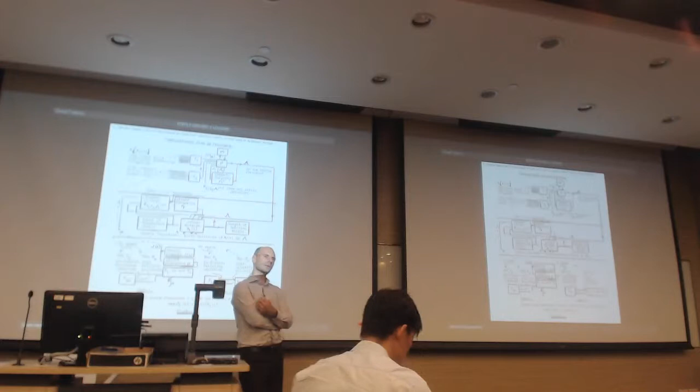And they did a bunch of diagrams, and some of these look like the messy diagram I showed you. Looking at relationships, looking at how the building needs to evolve or perform when it's being used. So he's not looking at structure as a starting point, and they're not looking at form as a starting point. They're looking at how the building is essentially a framework, and how that framework can contain or allow or enable events to happen. And so one of the earlier diagrams to emerge from this was this kind of diagram.

Just a simple representation of architecture as a truss, as a kind of volume, and then things plugging into that in different ways. And it almost doesn't matter what's plugging into it. What does matter is that you can plug anything into it, really.

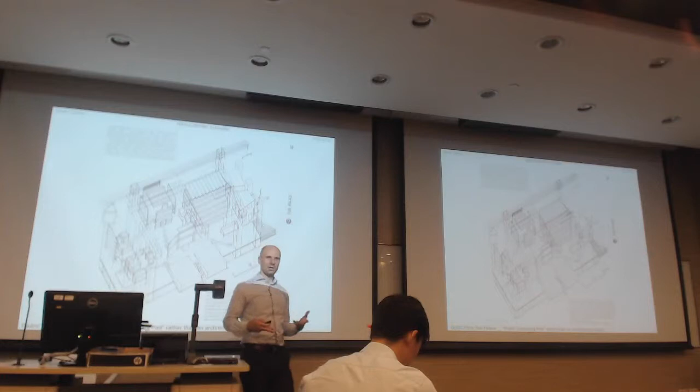The eventual design, which was never built, or was built in a changed form in a different project, really emerged as just that concept, as a kind of open truss framework with various pieces plugged in.

And everything in this building moved. Everything was flexible. Everything could be organized and planned to change scale, to change shape, to change in terms of its sort of technology, which would be available in any given room.

And all of this was enabled by, and this is 1960s, by a kind of computer that they designed. And this is before computers could be put in a single building, really. Artificial intelligence wasn't really a sort of thing back in the 60s, but the architects and the scientists thinking about systems proposed a computer which was in essence an artificial intelligence that would move the building.

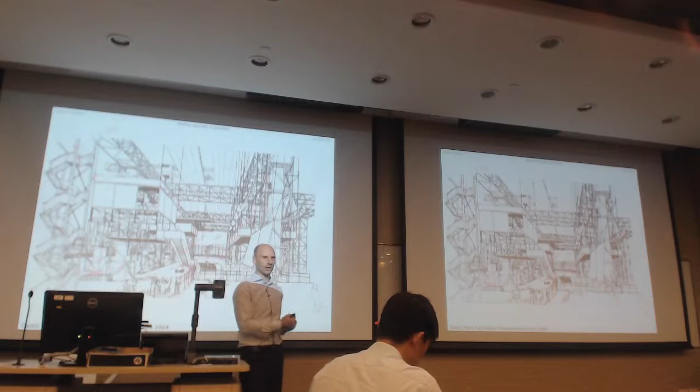The building would learn from its users. So as more and more people wanted to come to this building and go to theater, the computer would decide to arrange some of the rooms more often into theater shapes. And so the building and the users have a kind of continuous feedback loop that actually constructed the form of the building over time, rather than a sort of fixed object.

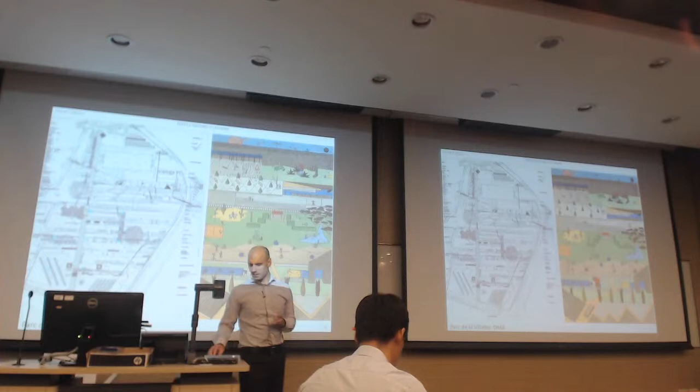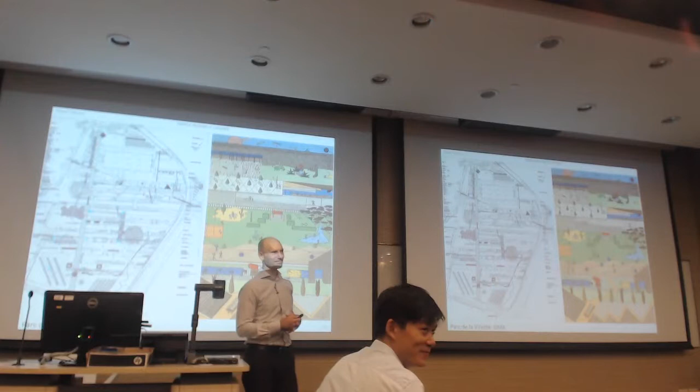One of Cedric Price's, not protege, but someone in that circle was Rem Koolhaas, who you probably all know about, right? OMA. Do they know about this? They know about this stuff, right? OMA is a very famous, big name architect nowadays.

In the 80s, Rem Koolhaas was not a very famous, big architect or planner. But he did a competition entry for a park in Paris. And he had just written a book about towers in New York called Delirious New York.

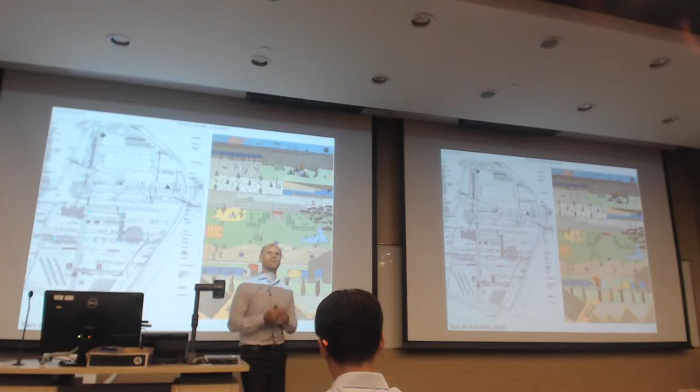And he thought about the park as different from the kind of parks that were in Europe at the time, which were sort of scenic and you could stroll through them, and they had rolling landscapes or maybe some axial decorative gardens. He thought about his park as essentially a skyscraper on the ground, so tilted over. And so he created these strips. And in every strip, you could do something different, just like kind of in a tall building, every floor can be something completely different.

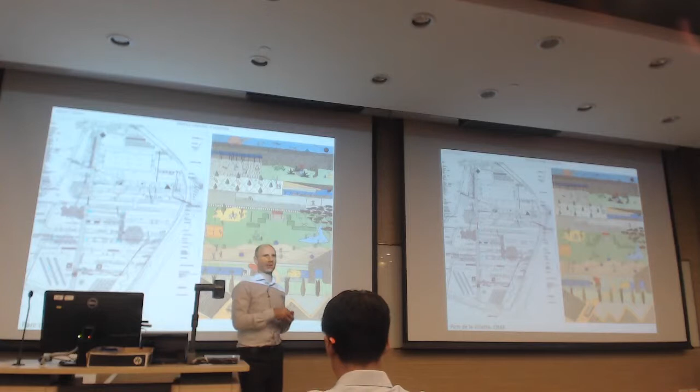And so his proposal for this park didn't win. It came in second. But it proved to be really fertile ground for a lot of landscape architects and architects working in the 80s, 90s, and even today. So this becomes a very prominent starting point for thinking about the discipline of landscape architecture, about the discipline of urbanism today. Parc de la Villette, Rem Koolhaas, OMA entry.

The stripy landscape, where the landscape is sort of just a framework, just a holder for activity, and actually the design is informed by these different activities taking place next to each other.

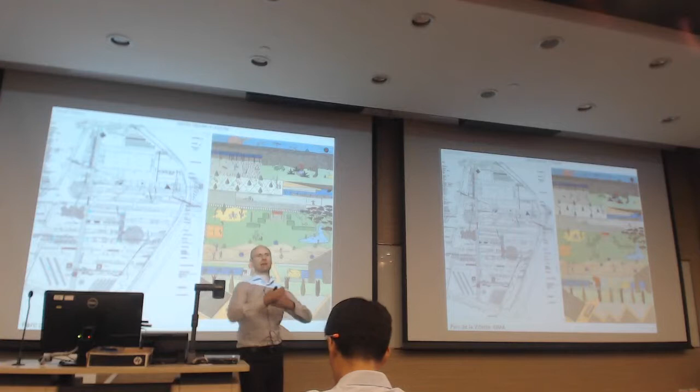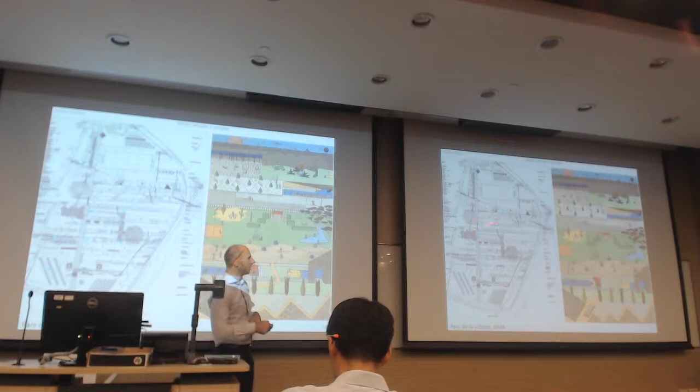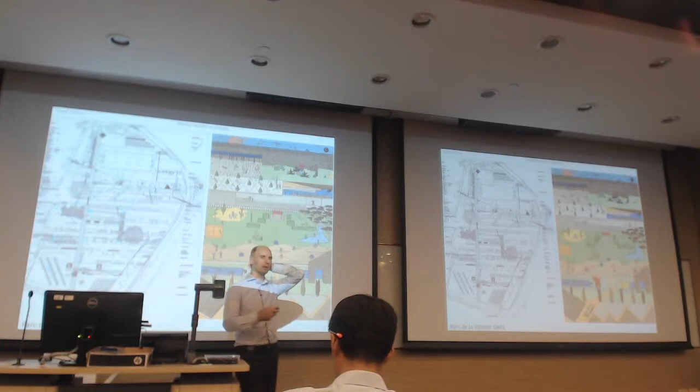And one of the things that came out of this was the realization that in a park you don't have to plan every single thing. Not every space needs to have a name. The most interesting things come out of the areas between things you program, where things overlap, where things hybridize. And so that kind of thinking is linked to, or you can actually prove it's directly linked to, a lot of Cedric Price's thinking about open-ended architecture and open-ended planning.

So just a few images on the ground.

The second point, the site. I want to argue that for you, site should not just be a boundary and an abstract idea of context. Maybe some history comes with the site. I want you to think about the site as being the material foundation of what you do. That the site is thick, that it has a lot of layers, and that you can mine those layers, literally and conceptually, to form the basis for your designs and your projects.

There's a good quote about the surface, about the site, by Stan Allen from about 15 years ago. He's also an architect, but he used to work with James Corner, who's nowadays a very famous landscape architect. He's the one that did the High Line in New York City.

Stan Allen says, increasingly landscape is emerging as a model for urbanism. Landscape has traditionally been defined as the art of organizing horizontal surfaces, so arranging gardens. By paying close attention to these surface conditions, not only configuration but also materiality and performance, designers can activate space and produce urban effects without building buildings, without the traditional apparatus of traditional space building, which is towers and blocks.

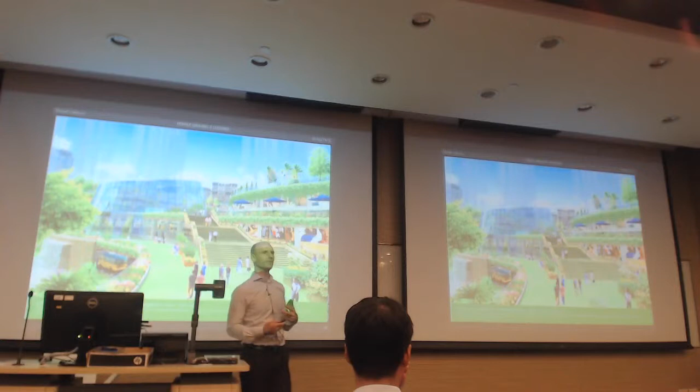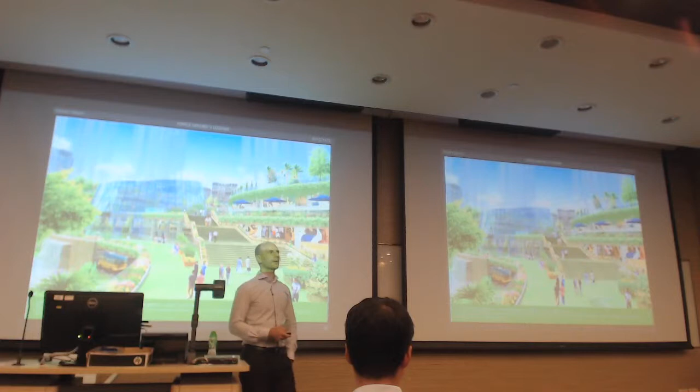So just even in thinking about the quality of the environment is the first thing. When thinking about ecology, we need to think about that habitat, that place that we live, that place where animals live, and try to represent and build that in more deep ways, not in shallow ways like this.

One of the, at least for landscape architects, you'll learn about this guy, Frederick Law Olmsted, who did a lot of work in the United States and a little bit in Europe, a long time ago, 100 years or more. He sort of led the way, even that long ago, in thinking about ecologies from the standpoint of a designer.

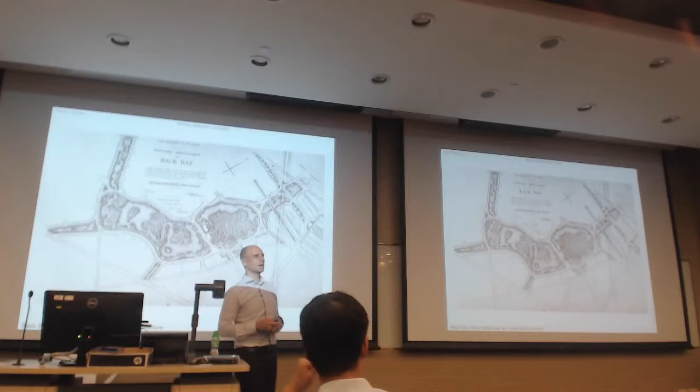He brought tidal water back into the area to flush out a lot of the polluted water and soils. He created gates and weirs to control the water at different times of the year, and changed the transportation around the area so it became a sort of enclosed urban park, one in which water would move through on its way out to the bay.

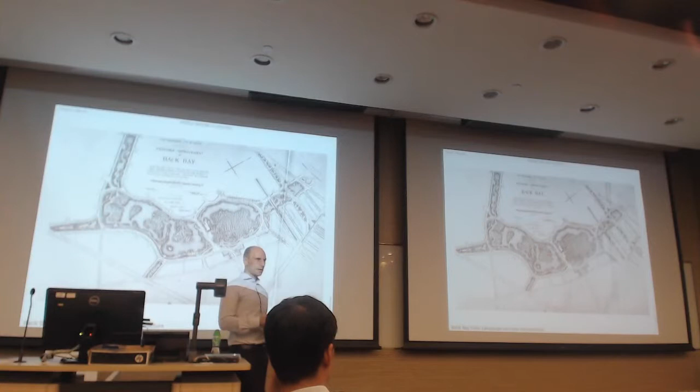This is at a time when a lot of landscapes being made in Europe are very pastoral or very much Beaux-Arts style, very decorative. He does something completely different.

He has done pastoral landscapes in the past - before this project, he had just finished Central Park in New York City, which many of you have probably heard of, a very pastoral landscape that becomes a center in New York.

For this project, he looked at the existing ecologies that were there - the grasses, the crabs that walked around, the way the wind moved through the place - and he wanted to build and design a landscape that actually mimicked the existing landscapes that were there before they were somewhat forgotten.

Even though he's working in an area of Boston that in the future would become very rich and affluent, his plan was to build a working landscape that echoed the ecologies of the past and looked nothing like what people were used to seeing in the gardens of the city at that time.

It was very much a functional landscape, an ecological landscape, a wild landscape, but one that was at the same time a public park.

We have to show pictures of it in the past because eventually, as the city grew around it, other designers came in and started to build beautiful little parks around their buildings, so it doesn't really work like that anymore. Today it looks like a beautiful pastoral park, but in the design of the architect, it was very much a functional, ecologically rich, yet also ecologically inspired environment.

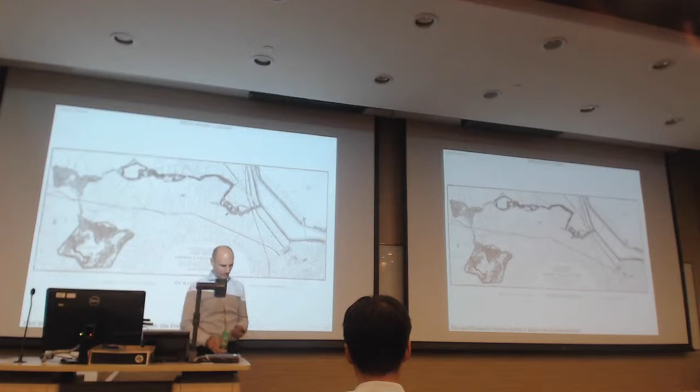Ian McHarg is probably someone the architects won't hear about again, but the landscape architects certainly will. Ian McHarg was an ecologist, a landscape architect, an urban planner in the United States, working in the 60s and 70s. He drew out some other issues about ecology that are still relevant within the profession today. He wrote a book called Design with Nature, where he asked us to reconsider how we live as people of the world. He was a very open thinker in the landscapes around us.

He had a very simple technique for understanding his environments. He would draw them. This was a time when they didn't have GIS, computer mapping, or CAD drawing, so they would draw these maps by hand, looking at aerial photographs and site surveys to map different things.

His big revelation was that he would not map landscape types, like saying this is a forest here and this is a meadow there. He would only look at their suitability for different things, depending on the project. For example, the maps you see here were for a project where he was asked to locate a freeway through an area of countryside, so he looked at that area only from the standpoint of building a freeway, because that was the problem in front of him.

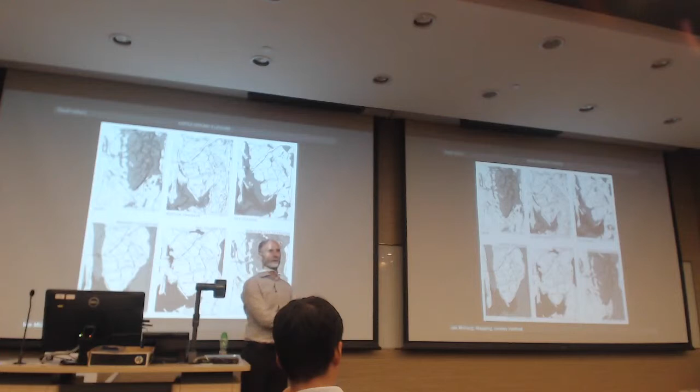So he looked at the soils and mapped where they were good or bad for building highway foundations. He looked at habitat and said, we don't want to build a highway in this really nice habitat, we want to build it over here. He would make maps with shading from white to black, black being least suitable, white being most suitable for multiple factors, then lay all these maps together on pieces of clear paper.

This became known as the overlay method. It's not something he invented, but something he made very popular. All those gray and white maps would lay on top of each other on a light table, and he'd trace a line through the areas left over in white, which again were the most suitable, and that's where the highway would go. It's a very scientific way of thinking about ecology, a process that came from a very informed way of thinking about ecology and living in the city.

That practice evolved, through working with people at Penn, into a computer system that would do the same thing. That computer system eventually evolved into GIS, which, at least for landscape architects, is a very big component of your education in Hong Kong.

The thinking wasn't piecemeal behind this practice. It was very much about thinking of overall landscapes, about performance, habitat and ecology in very open ways. He would look not just at single sites, but consider their functionality from the standpoint of the larger region they sat in, so he was careful to think outside the site boundary, not just within it.

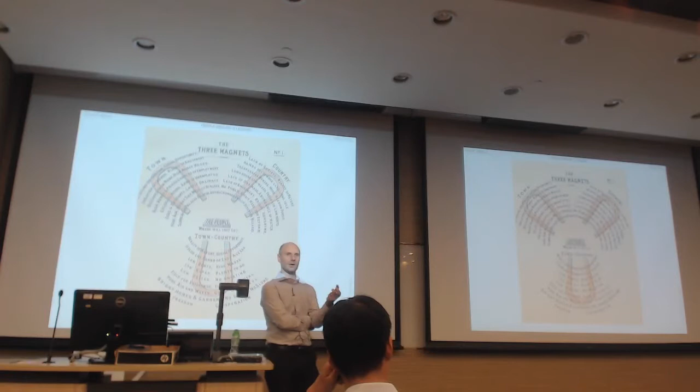He wrote a book called Garden Cities of To-morrow. In that book, one of the central diagrams was this idea of incorporating landscape into the city through green belts and careful planning. He proposed a concept called the town country, different from the town, different from the country, but a merging of the two. Then he would propose master plans for cities built in very functional, very rational ways.

I've heard that the book he wrote is one of the best-selling books ever in terms of books about architecture and planning in China, ever. It's been translated, and so many cities in the region are using these sort of concepts to plan their futures.

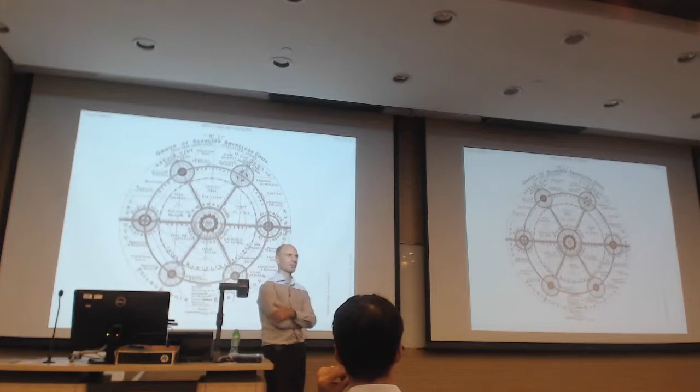This sort of thinking permeates through the century and becomes relevant at different times, both for space planning of large cities - thinking not just about planning new cities, but planning existing cities and planning green spaces around each neighborhood at a larger scale.

Thinking today about how we integrate landscape into cities - now cities are really dense and full, so we think less about big central parks and more about landscape systems: greenways, river corridors, and armatures to hold the city in place around green functional landscapes. So you'll see plans emerge that deal with networks of ecology, not just points of ecology.

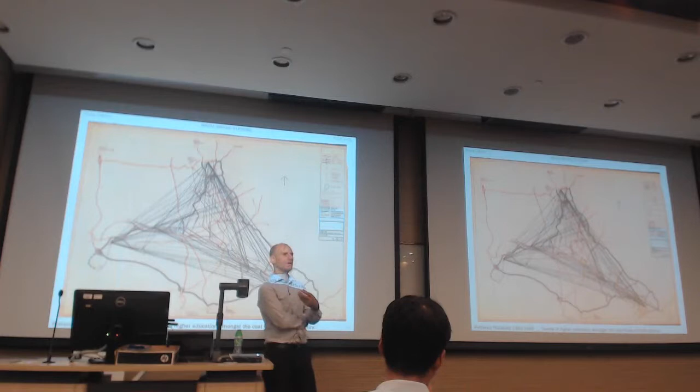There weren't a lot of roads, but there were a lot of rail lines. There wasn't a lot of population, but there was a lot of need for education, schools, these sort of things. So he did some mapping and found three core areas that still had people left in them, and tried to map the different relationships between those people and their landscape.

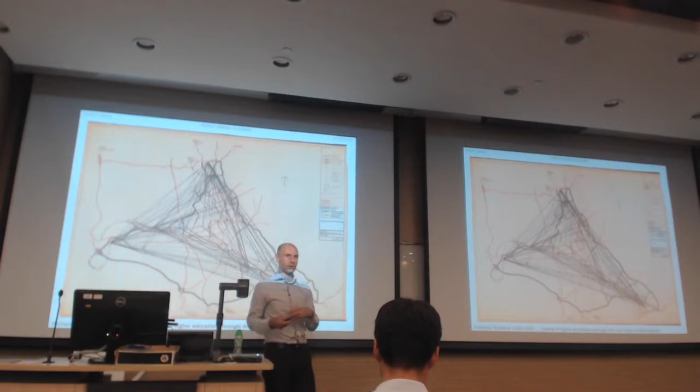What he proposed was not a building, not a town plan, but a system for re-educating and reinvigorating the economies of this place. He actually proposed a university, but a university built on a railroad line - a mobile university constantly in motion, moving back and forth between these three core towns. He called it the Potteries Thinkbelt. The Potteries area was famous for its pottery production, so this became the Thinkbelt in that area.

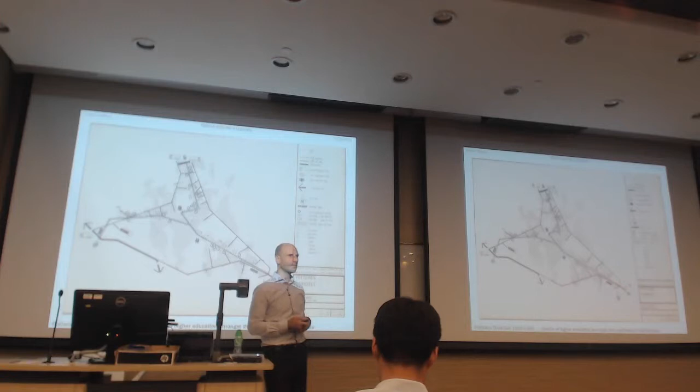And it was a center of education for people, and it was really modular, open-ended, and totally flexible. This was because he, as a single designer, couldn't know the future of this place. He recognized his project would take 20 years to complete, and in 20 years there might be a totally different situation on the ground. So he would have to be really flexible in what he proposed.

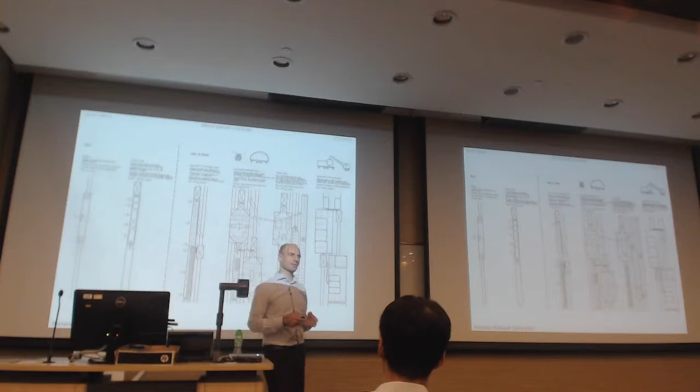So he ended up with a very modular system that was organized along the transportation lines and constructed from things you could put on a railroad car. The university, the dorms, all of these things became this modular institution that could shift and reemerge in different areas according to different population growth, according to different educational needs.

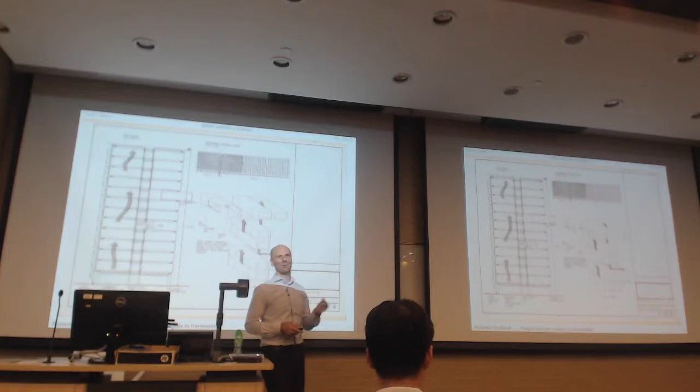I at least like to look back a lot at Archigram, who you'll hear about later. They have a lot of work, some of it very meaningless, some of it very rich of ideas. One of my favorites is this idea of the Instant City.

They proposed that in certain areas that were in decline, or where you needed to build events—not Olympics, but maybe smaller events—a series of mobile infrastructures could come in and drop useful functions and utility within a city and then leave, delivered by a blimp. That city could be reinvigorated with the seed of infrastructure, the seed of events. When the blimp leaves, you still have the remnants, the pieces of this event-based architecture in place for new things to emerge in the future.

So the project is marketed as this instant city, but one of the outcomes is this continuous rethinking of the city, of the armatures and the infrastructures of the city.

A couple more projects I'll show, which are much more contemporary, which think about these open-ended ways of approaching design projects and the kinds of drawings and thinking you would do as a student to convey these ideas.

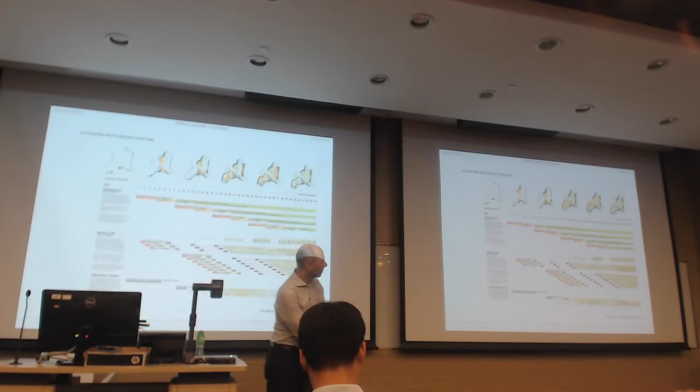So the park emerges over a period of about 40 years, which is a real urban growth time frame, in small pieces. But the master plan, the scenario plan, envisions a functioning structure, while working out how to create those relationships continuously over time.

You can see he makes a lot of these phasing maps, and creating a phasing plan is very important when thinking about large-scale, long-term projects—urban-scale projects, landscape-scale projects. In that phasing plan, he'd deal with different types of things.

On one level, he'd be dealing with circulation. How do you create a landscape that's tied together always, even though different parts are being added at different times throughout the next four decades? So we worked out how to create different circulation spines and different types of circulation so that the place would be stitched together always.

He looked at the ecologies, at planting ecologies—not by planting a finished forest, but how to plant one tree at a time, to create a forest that would emerge after two generations, not instantly. So it was a way to save money too. And he looked at program, trying to map out all of the different things people could do in this park as it emerged over time.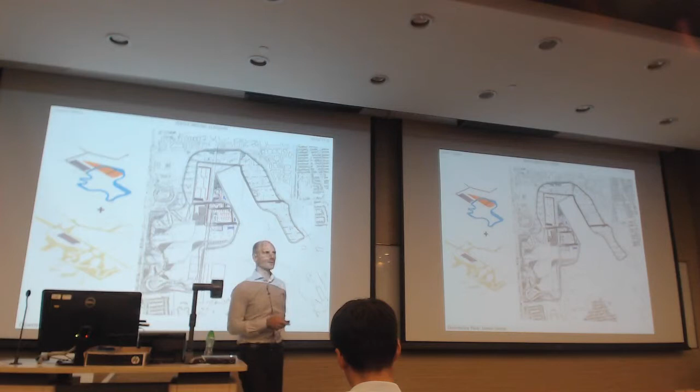One project by James Corner Field Operations looked at ecologies that build up over time through simple interventions on the ground. His strategy was to just make little ditches in the ground, little canals, and that was it, earthwork.

Over time, that earthwork would carry water, hold water more in some areas. Over time, the area that held more water would grow different types of plants, according to the native ecologies. Over time, those different types of plants would lead to different kinds of animals coming into the place.

So just by marking the ground, which was the proposal, he proposed that over 20 years, a rich, diverse forest would emerge from this place.

And then Bernard Tschumi explored the sort of phenomenal effects of very similar thinking. So he made a lot of maps like this that looked at how plants grow together over time, and these became the armature around which he created the design.

He had different mixes of plants, different mixes of seeds that he proposed planting in different areas, and different mixes of seeds would have different spatial effects over time. So it was a more architectural way of thinking, less ecological, but more environmental, thinking about the full physical environment, and about how that environment gets more wild, more dense, more provocative over time.

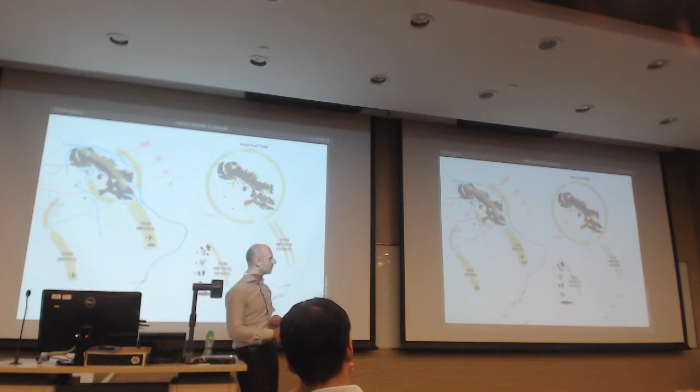They found that the further you got north, the higher the food cost, because all food was shipped in by plane or by ship, so costs were really high. They looked at circulation here and found that there were a lot of circulation bottlenecks, so that food did not move very efficiently across the islands.

And then they looked at what was actually there. They found that people were eating lettuce from California, and they were eating berries from Holland. So they actually looked at what could grow in this environment and how maybe that could be the starting point for thinking about urban planning or urban design.

And they found a lot of different proteins, a lot of different vegetables, a lot of different animals, and polar bear. I think they were mapping not just food, but also the food chains to understand what was there. I think you can eat seal, I think native people eat seal, and I think the fat also is good fuel.

Their proposal was not a piece of architecture, it was not a park. Their proposal looked at these things: the devices people use to move across the landscape, and it looked at the patterns that they move across the landscape, and it looked at creating essentially recipes.

of promoting different foods that people could eat and different ways that those foods could be delivered seasonally to the island. So they made maps like this that looked at when things were available and created plans for how, when those things became available, they could be exported within the island.